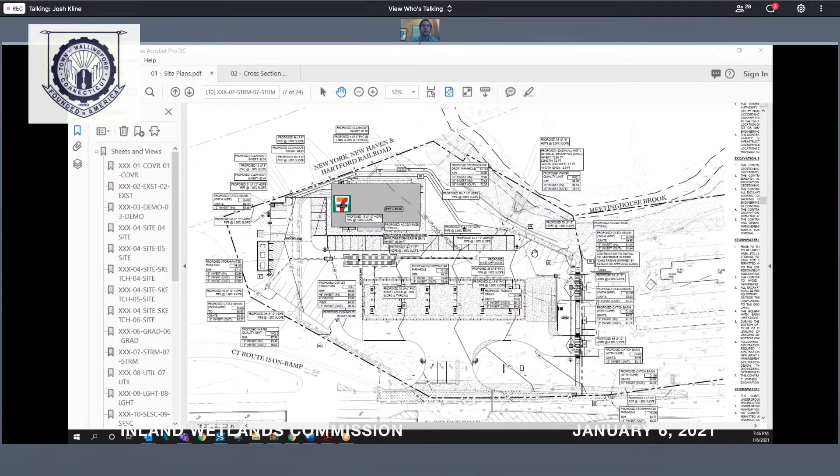The next item is still there, I just wanted to highlight the properties. So the next item in this train of events is we are proposing a water quality unit—a hydrodynamic separator. I wanted to note that the way this separator is built, there are four chambers and a series of baffles. So this unit itself has a lot of similarities to an oil water separator. Even though we don't have the separate oil water separator...

I think the intention of this water quality unit is to separate solids, collect any floatables, any trash, any hydrocarbons that were to float and make it through. So we still have that element as part of the plan, even though we've removed it and relocated it with a skimmer in the inlet. The next big change is at this connection point, where we've done two things.

We've raised the pipe coming from the fuel area so that it's about 1.5, actually 1.38 feet higher than the pipe coming out of the infiltration basin. So effectively these are no longer at the same elevation. We're connecting the fuel area further downstream than the infiltration basin, and we've made sure their inverts are separated, which would prevent any backup from going through the trench drain or fueling area. Those were the main changes addressing the big comments. I'm happy to answer any questions, but wanted to keep it short and to the point.

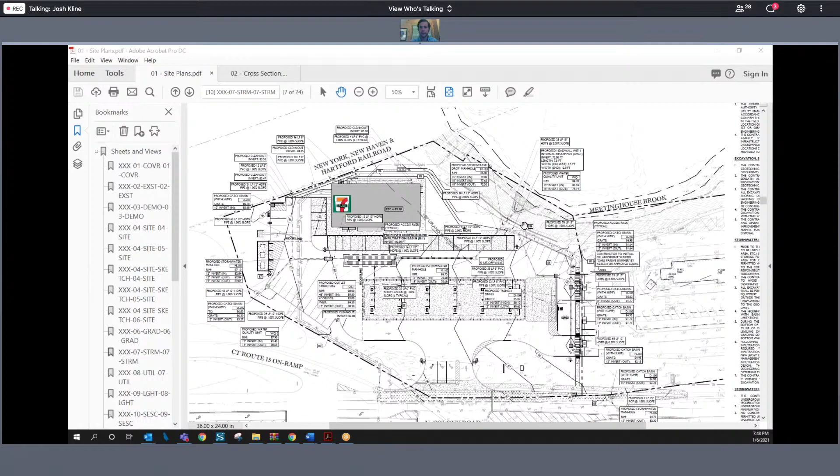I think those are the responses, Mr. Chairman. I know Josh has spent a substantial amount of time communicating with Aaron. Josh, maybe you can address this - I know you submitted a written response dated December 30th, which is part of the record, to some of Aaron's earlier comments. But as Aaron pointed out at the beginning, I believe we're pretty far along, if not there, from a staff perspective, in addressing the concerns that have been raised.

Okay, let me ask the commission first, but I am disappointed that you didn't find a separator that would separate the ethanol gasoline from the water, since I come across that from time to time. But it's a difficult issue. Commissioners, any comments, any questions?

Allie? I don't have any. Jennifer? I don't have any. Deb? I don't have any.

Robert? The question I have was about the drainage coming off of the 7-Eleven building itself. Is that tied into the water separator, or has that been changed to a different location, as you mentioned earlier? The building connects directly to an infiltration basin and its runoff is infiltrated. And it's tied into the runoff from the pumps itself also - are they tied in together? Sorry, one more time? Are they tied in together with the runoff from the pumps? So technically everything discharges at one point, but what we've done is separate both of those areas until that last manhole, that last structure before the discharge point into the brook.

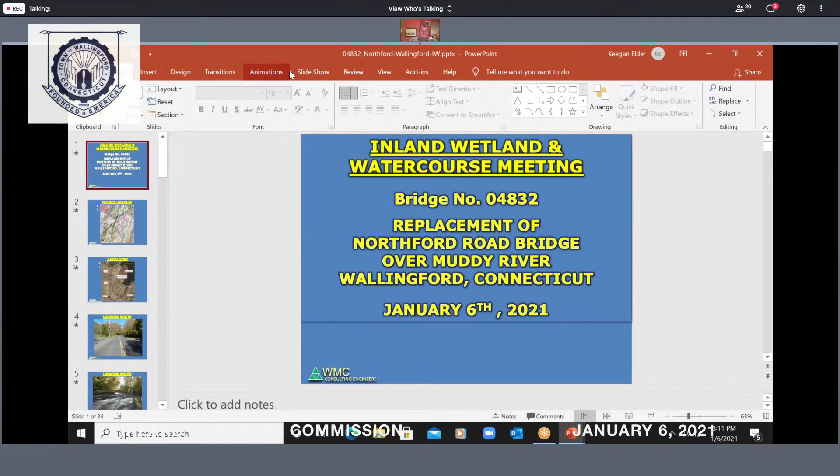Keegan is actually here for the next application on the agenda, so he could step away so John could present without a mask. That would be much better. I would appreciate it. Thank you.

No problem. Good evening everybody. My name is, as Allison mentioned, John Wayne. I'm here from WMC Engineers representing the town for the Inland Wetland Watercourse meeting, January 6th, 2021, for the replacement of Northford Road Bridge over the Muddy River in Wallingford, Connecticut. Conn DOT bridge number 04832.

I have a project location map. The project site is just southeast of the central part of town. I have a blow-up aerial view of the project site, in the lower portion of the stream. You can see the MacKenzie Reservoir just upstream.

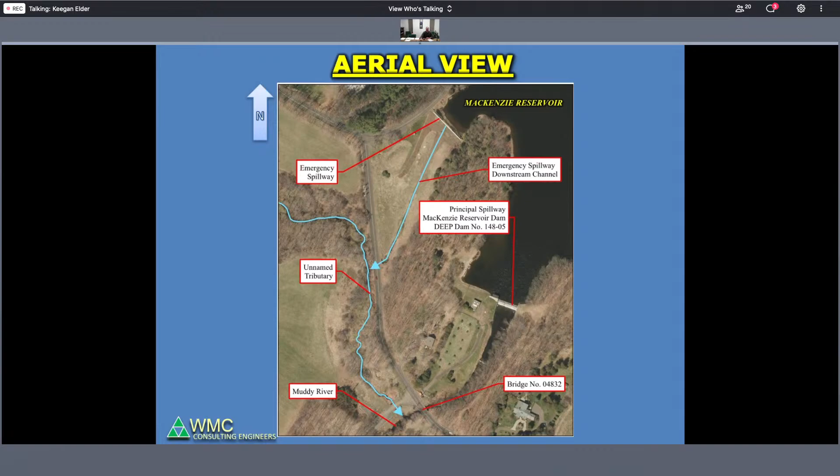Excuse me, there's a little lag time between the presentation and the screen here. I have a couple pictures: this is from the bridge looking north, this is from the bridge looking south, and this is the upstream elevation looking downstream at the bridge.

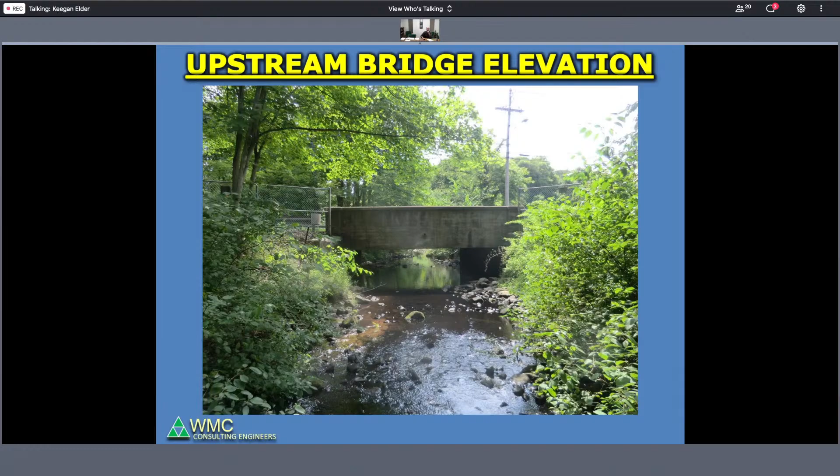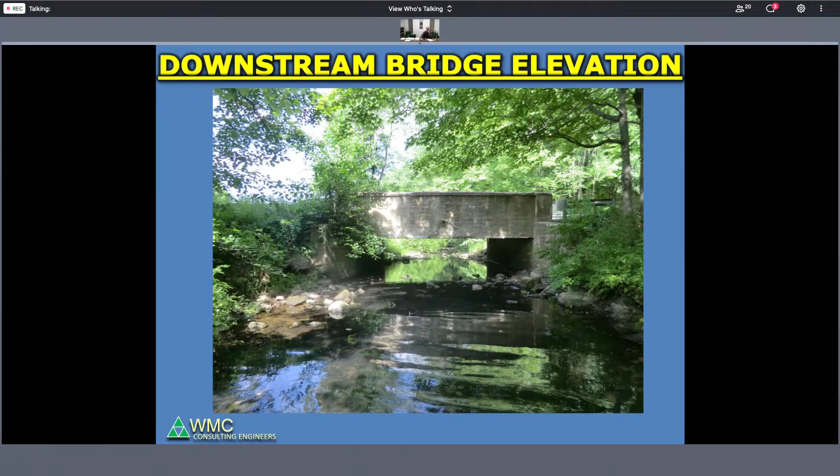Did we freeze? Yeah, just a little lag time. This is looking upstream from the upstream portion of the bridge. This is the downstream bridge elevation looking upstream. And this is looking downstream from the bridge itself. So a couple of these pictures just to get you familiar with the site.

So the existing bridge, number 04832, some reasons for the project: the Connecticut DOT inspects this bridge every two years. In January 2019 the bridge was inspected. The bridge was built in 1938, so it's approaching 100 years old. The superstructure was rated in serious condition, the substructure was rated in satisfactory condition, and the overall structural evaluation required high priority of corrective action. The bridge is currently safe but warrants replacement, and that's why we're here tonight.

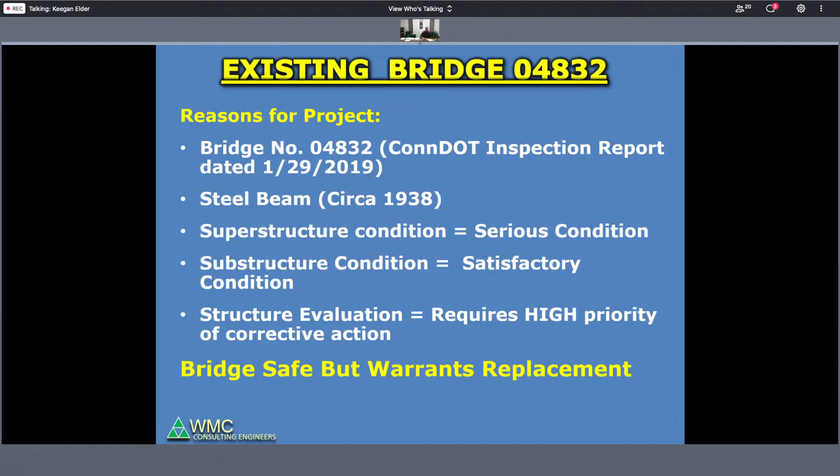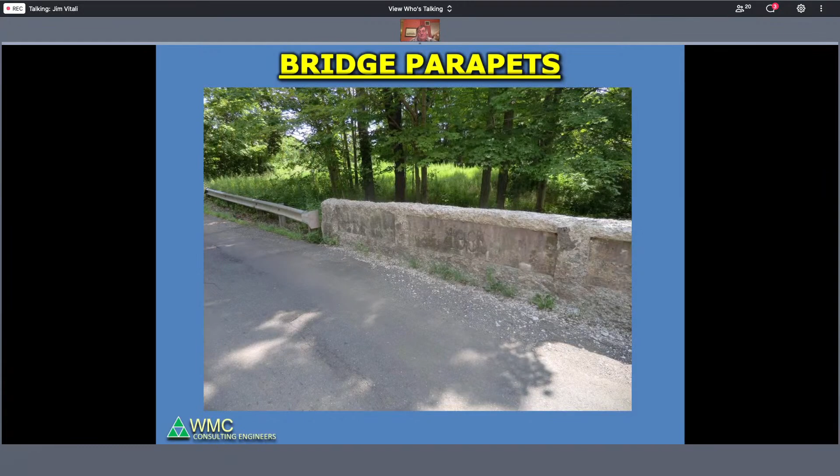Just a couple pictures of the bridge itself to show the condition, this is the underside of the bridge. Keegan, we really want to get into the wetlands aspect of this, not the structure of the bridge, please. Okay, I'm just trying to show a couple of the reasons why.

So here we are, environmental considerations. We've consulted with DEP and received coordination in 2020. They've determined it will not significantly impact any fisheries and/or habitat. Our unconfined in-stream activities will be limited to the time period of June 1st through September 30th. Our fisheries enhancements were included in the design, including rounded toe boulders at the toe slope and a rock vane installation. There are no known contaminated soils or hazardous materials within the project. Best management practices will be utilized during construction, all disturbed areas will be restored upon completion, and Town, DEP, and Army Corps permits will all be acquired.

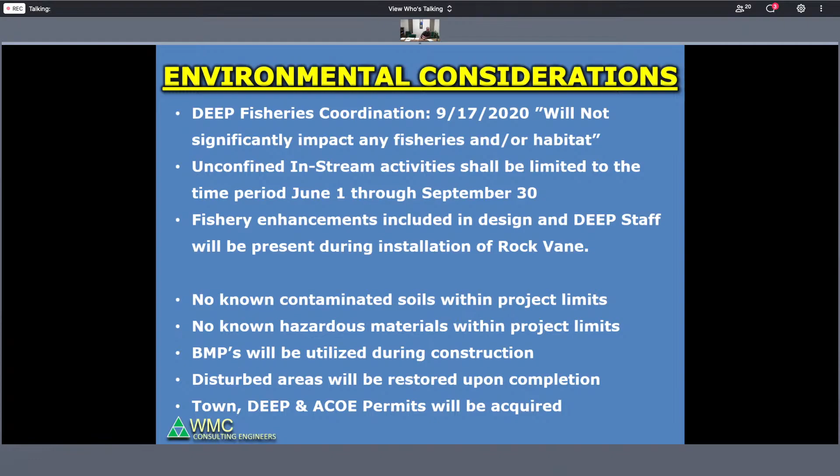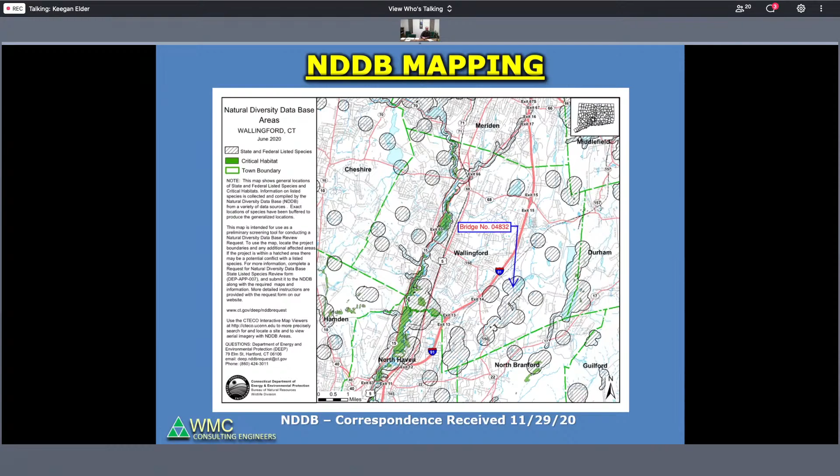The project is within a FEMA flood zone and an adopted regulatory floodway. The area is indicated by the DEEP to have species of special concern. We've coordinated with the NDDB and received coordination on November 29th, 2020. Both our 2017 coordination and our 2020 coordination identified 2 species of special concern.

As part of our contract documents, we will require the contractor to hire a qualified biologist to ensure protection guidelines are adhered to. Work shall occur between April 1st and September 30th when the species are active. No in-stream work shall occur between November 1st and April 1st. Exclusionary practices will be required.

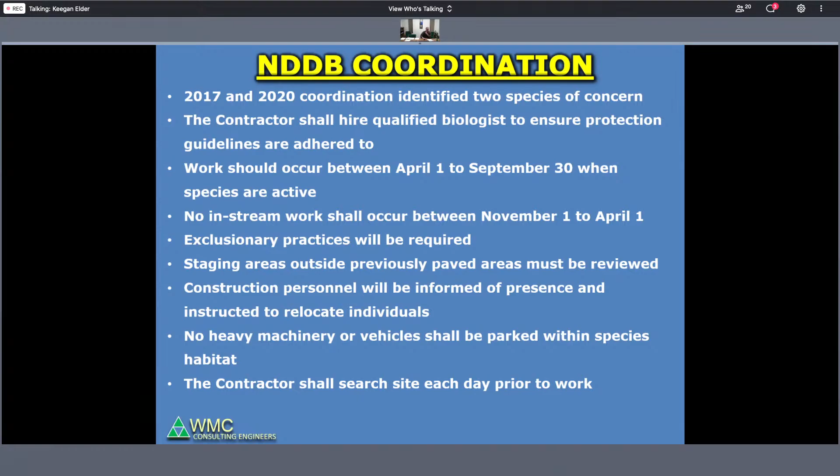Staging areas outside previously paved areas must be reviewed and approved. Construction personnel will be informed of the species' presence and instructed to relocate individuals. No heavy machinery will be allowed to park within any species habitat, and the contractor shall search the site each day prior to work.

The 2020 coordination also identified 1 known plant species of concern. A plant survey will be performed in the spring of 2021 by a qualified botanist. If found within the construction limits, a conservation plan will be developed to address short and long-term management recommendations. Findings will be submitted to the DEEP for final determination, and all correspondence and findings will be submitted to the town environmental planner.

Our proposed construction is to replace the bridge with a 40-foot clear span pre-stressed deck unit, with the superstructure supported on integral abutments and cantilevered U-type wing walls. Our substructure will be founded on micropiles, rock socketed into bedrock.

Our structure span meets the 1.2 bankfull width requirement and will remove historic fill in the wetlands and watercourse. We plan on leaving the existing concrete footings for the abutments and wing walls in place, removing only the stems 2 feet below grade, installing toe boulders along the channel and grading limits, and installing rounded riprap embankment protection. We will be maintaining existing channel grades and channel material.

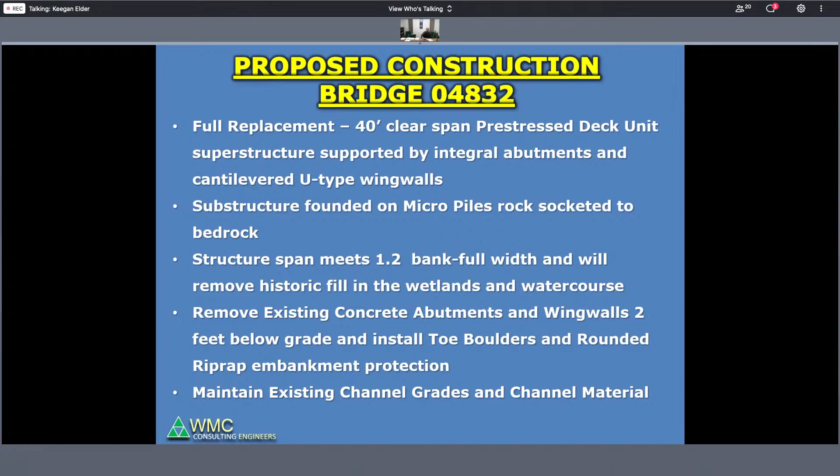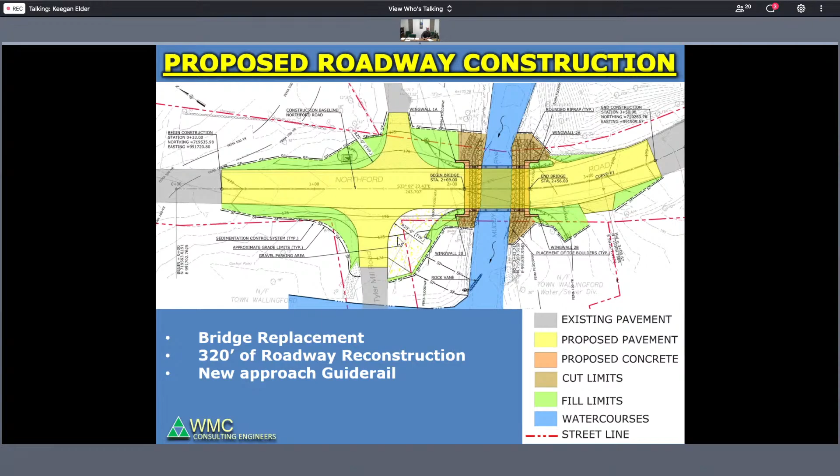Proposed roadway will consist of 320 feet of roadway reconstruction, a bridge replacement, and new guide rail. This picture shows the overall limits of the project. The yellow represents the new pavement. The green represents fill areas, which will be established with turf. This brownish orange material along the river is the area we are going to be removing, our cut areas. This yellow hatch is the horse trailer parking, which we'll be maintaining.

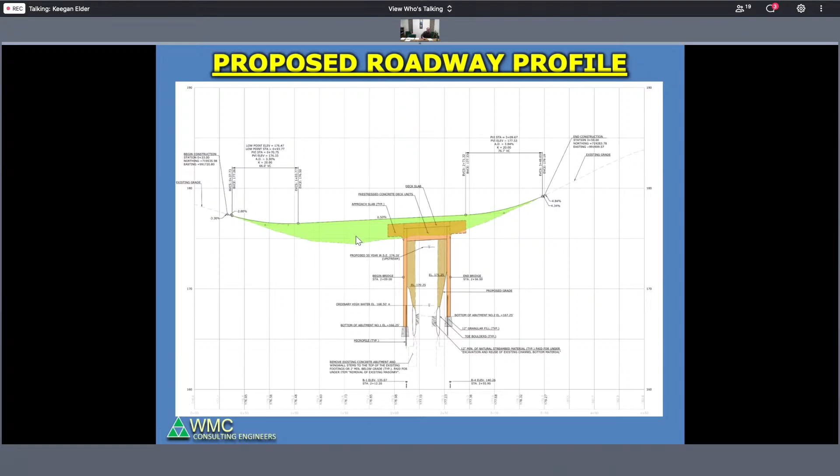We will be raising the road by approximately 2 feet at the low point. This is to accommodate a 50-year design storm for the bridge.

A bridge elevation view, which is not vertically exact, showing what the bridge is proposed to look like. The red represents where the existing abutments are, and the outside orange area with a concrete form liner is our new span. This area where the rounded riprap is shown kind of matches, but this brown area to the right and left of the red is where we're going to be removing all that material behind those existing bridges.

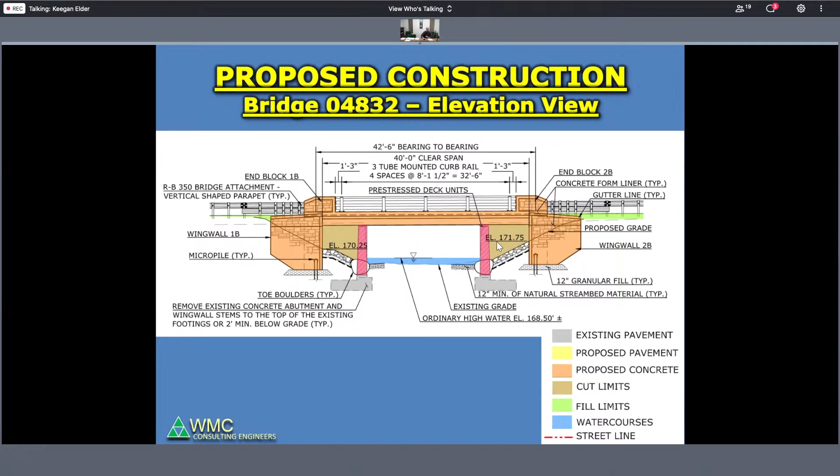We're providing 2 12-foot lanes and 2 2-foot plus shoulders on both sides of the bridge.

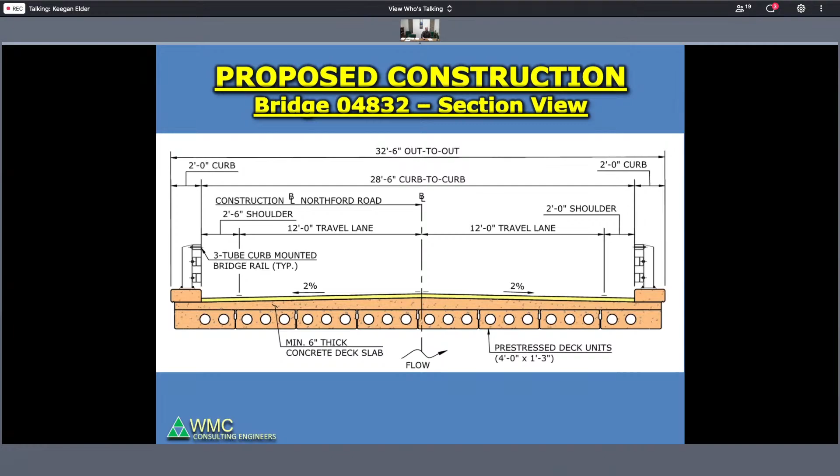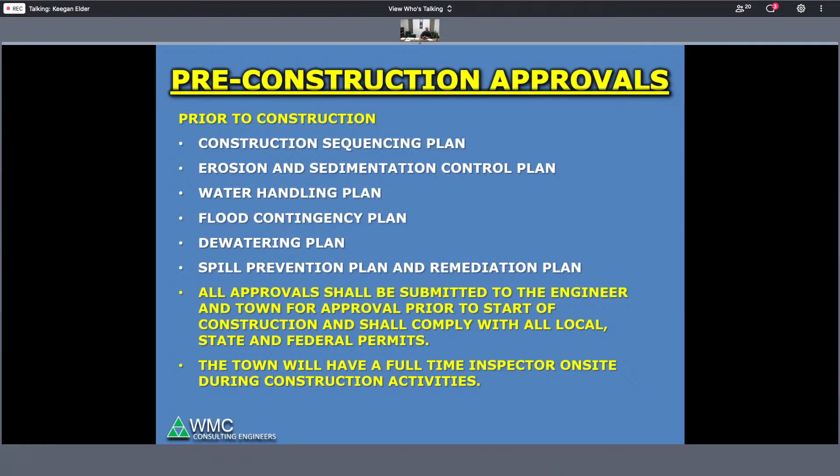For pre-construction approvals, prior to construction the contractor will be required to submit a construction sequencing plan, erosion and sedimentation control plan, a water handling plan, flood contingency, dewatering, spill prevention, and remediation plan. All approvals shall be submitted to the engineer and the town for approval prior to the start of construction and shall comply with all local, state, and federal permits. The town will also have a full-time inspector on site during construction activities.

Our proposed construction staging, on our design plans: Step 1 would be to install E&S controls. Then we'd like to install our temporary cofferdams downstream and install the rock vane. After that's complete, we'd like to install the debris shield and remove our existing superstructure.

Then we'd like to start constructing the new abutments and wing walls behind our existing substructure, utilizing the existing substructure as some water handling devices. After those new abutments are installed, we'll install water handling cofferdams in the channel in front of our existing abutments, and remove those existing abutments to 2 feet below grade. After that's done, we will install the toe boulders and the rounded riprap on the newly graded embankments, and then reinstall the natural stream bed material.

So let's just back up a second. When we excavate those walls out, we'll be removing the existing stream bed material and stockpiling it. Then after we're done with the riprap, the rounded riprap, and the stone bowl channel boulders, we will be reinstalling that stream bed material into the channel.

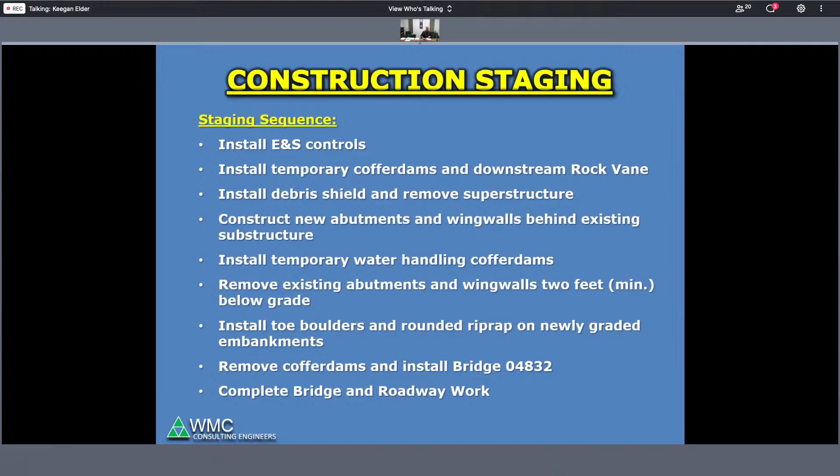After that's done, we'll remove the cofferdams and install the superstructure. Then we will complete all our remaining bridge and roadway work. So this is a little blow-up of the plan itself.

You can see downstream, we'd like to put this rock vane in early in the season. Then we'd like to come back and start building our concrete abutments on either side. We are going to maintain water in the center portion of the channel, maintaining flow at all times.

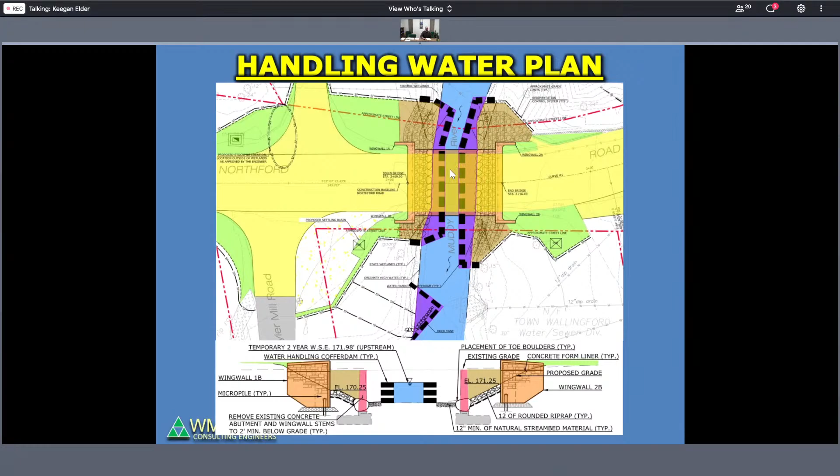Our water handling devices will be designed for a 2-year water surface elevation of 172 feet. And we are providing a hydraulic opening here that the contractor must maintain.

Our wetland and watercourse impacts: in my impact plan, we are impacting a total of 1,550 square feet of both state wetland and watercourse impacts. Let me just move the GoToMeeting. We also have about 9,200 square feet of upland review area impacts.

Most of our permanent impacts are going to be directly adjacent to the existing wing walls, where we're going to be cutting this material back to install our new wing wall structures. I believe it resulted in a negative fill of about -5 cubic yards that we're going to be removing out of the wetlands and watercourses in those areas.

As I just mentioned, we have 1,550 square feet of impacts, approximately 0.035 acres.

We met with Erin after her review of the project, and she requested us to put a plantings plan together. So we will be providing a planting plan, which will incorporate native species that exist at the site currently, and we'll also be using conservation mixes along the embankment slopes disturbed by the construction.

Our permits that we are going to be required: we will have our local inland wetland permit. Right now, Allison's working with the town to see if a local flood management permit will be required, and we'll submit that if it's required. We also will be going in front of the Army Corps of Engineers and the DEP in an interagency coordination meeting this spring, and they will determine what types of permits they require. Right now, we are anticipating a self-verification and a 401 water quality certification.

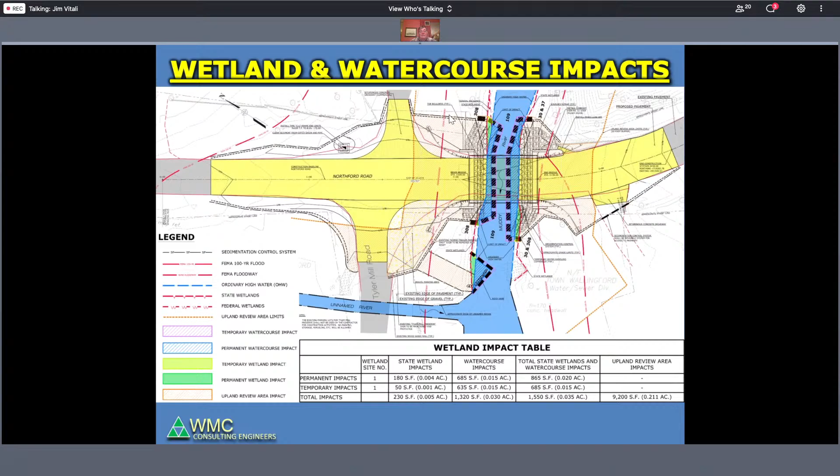Okay commissioners, comments, questions? How about Robert, any comments?

I do. You mentioned stockpiling the soil that you're removing to reinstall. Where do you plan on stockpiling it? Because I know that's a pretty well-used area for horses and trailers and what have you.

Yes, discussing with Erin, we do know that there are 2 parking lots that we will not be able to use for Tyler Mill, so those will not be used. We're also in that 100-year floodplain, as I mentioned earlier, with FEMA.

So right now, since the road will be closed to the east of the bridge, and there aren't many driveways for a few hundred feet, we'd like to utilize that area for construction trailers, staging of equipment, and stockpile of material.

Okay, thanks. So just another thing, we also have to maintain Tyler Mill open during construction, so there'll be a very, very small amount of space for the contractor to utilize on that western side.

That's all I had. Very good.

Debbie, no questions? Jennifer, I don't have anything. Ally, no, I'm good. Nick? All set, Jim.

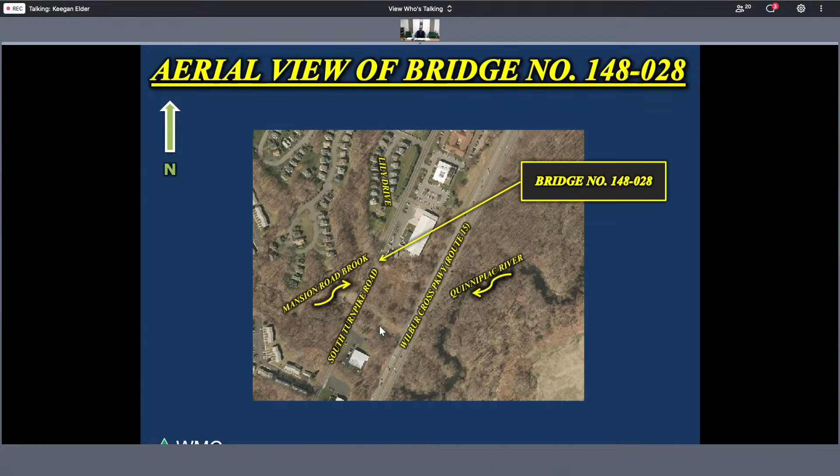Some general information about the structure before I get into the details of the wetland impacts: this structure is a twin 4x3 concrete culvert. It's in poor condition and in need of repair. It's funded under what's called a state local bridge program, so there is some review by the department and the town. That's the general information about the project.

Both culverts are about 39 feet long and run under the roadway.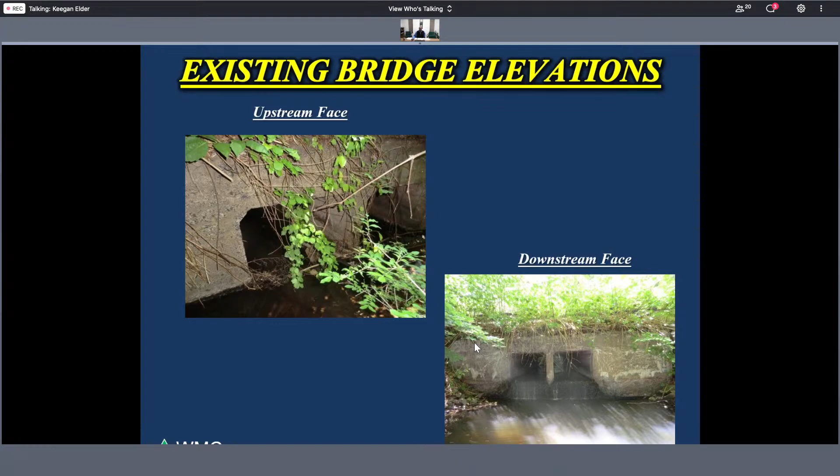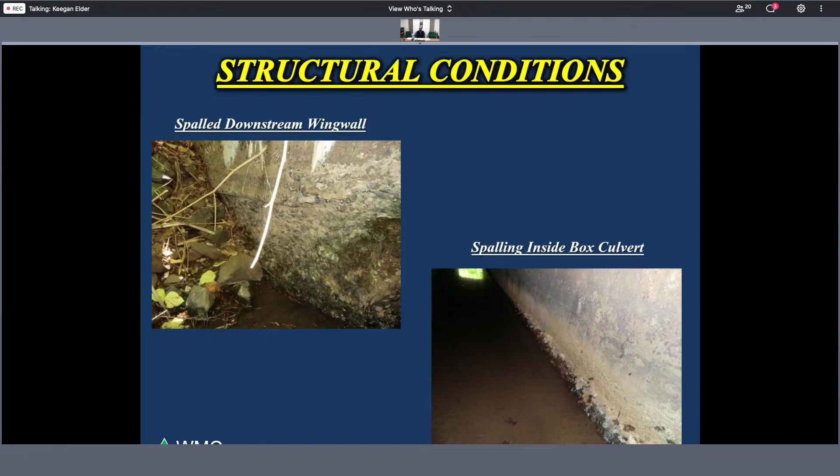Here's an upstream view of the structure standing in the channel, and in the bottom right, the downstream elevation of the structure. Some of the deterioration on the head walls are things we're going to fix, and on the interior of the culverts there's spalling and deterioration that warrant rehabilitation.

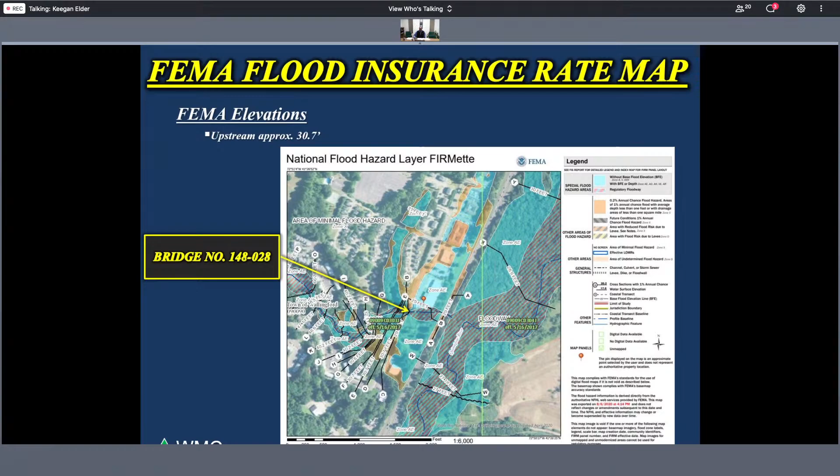FEMA flood elevations—not much happening here, we're in the flood zone. This is an existing conditions map. In green, you have the FEMA floodway. Blue would be our wetlands, federal and state, and red dash would be the watercourse upstream, and we go downstream here.

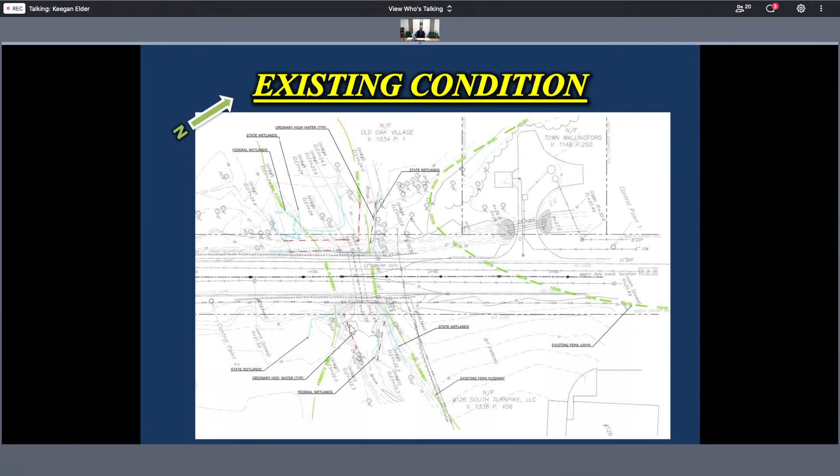So the proposed construction activities: we intend to line these culverts with concrete, centrifugally line these culverts, and patch the wing walls. Essentially what we're going to do is handle the water and do half at a time—divert water from one culvert while we do work in the dry in the other culvert, then flip it once we're done with the first.

The concrete lining we're doing is a centrifugal liner that we've used on projects for the state, things like Route 2 and Route 9, where we don't want to disturb traffic above but want to work underneath. They pull this sort of 'Gatling gun,' as they call it, through, and as they slowly pull that machine through, it spins and sprays fiber reinforced concrete on the existing system.

This culvert is going to have a 1-inch thick fiber reinforced liner on the inside for both structures when we're done. The contractor will get in there with hand tools and smooth things off, and also do upstream and downstream work on the wing walls and head walls.

In addition to that work in the watercourse and wetlands, downstream there's a significant drop off, as you saw in one of the earlier pictures. We're going to install a riprap splash pad or riprap boulder cluster just at the outlet. This will help alleviate the undermining problems currently occurring there.

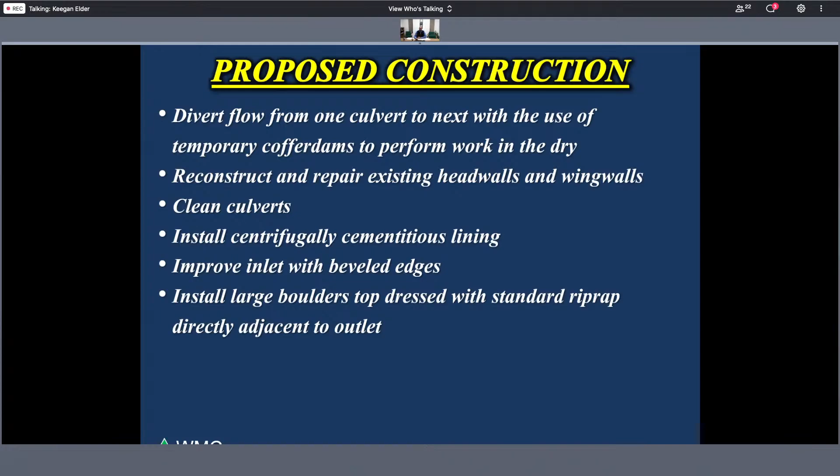On this view, in the legend, the green represents the watercourse impacts. These are the culverts here right next to each other that we're going to line with that centrifugal reinforced concrete, and as you get to the outlet, we're going to install the boulder cluster right here.

Let's go back—yep. So the riprap downstream just at the outlet helps with velocities. This grading you see here opens up the downstream pool, provides additional habitat, and this is the rock vane just downstream of that grading, which helps slow velocities as water comes through here.

So our watercourse impacts are shown in green. We have wetland impacts in blue—those are temporary wetland impacts.

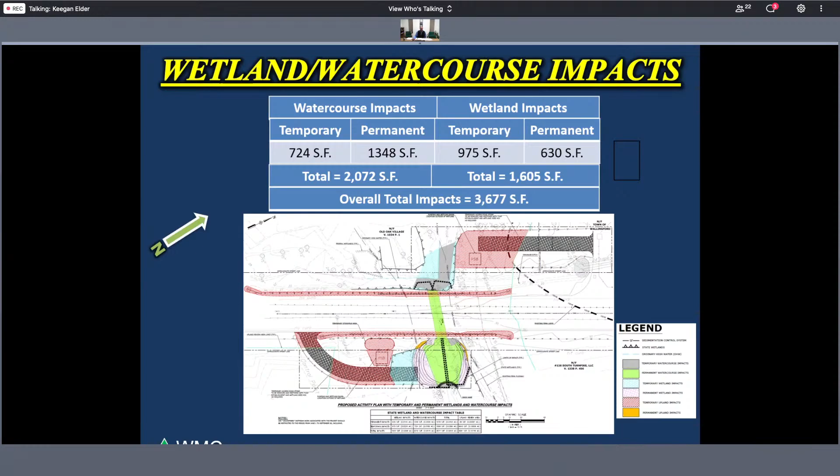Here's a typical section showing the existing culvert, flow running from left to right, traffic right and above. We have overburden or fill over the culvert, guide rails off to the side. As I mentioned, we're going to be putting a liner in on the inside - a centrifugally cast liner. We'll bevel the edges of the culvert. The reason we bevel the edges is to help with velocities and hydraulics.

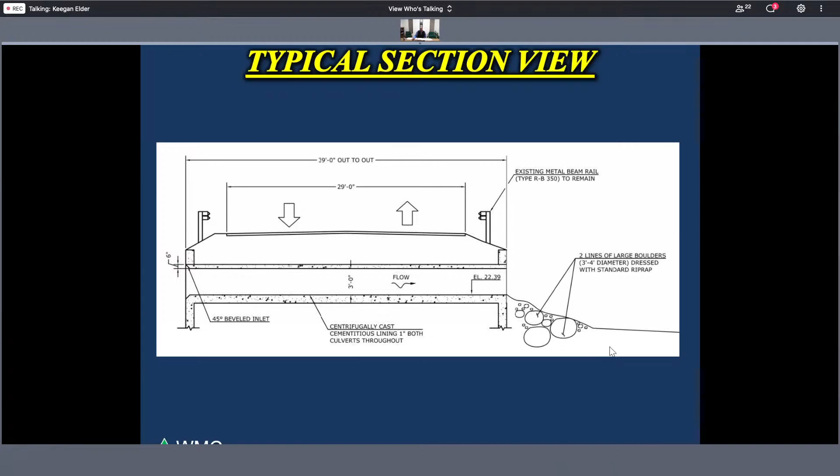When we add the liner, we're reducing the hydraulic opening by that 1 inch. In order to offset that, we bevel the inlet, which allows or funnels water through faster, and that helps with the hydraulics. Just downstream, you can see the riprap area I talked about to protect the culvert from being undermined and also stop the erosion happening right now at the outlet.

Floodway impacts: because we're lining, we're adding concrete - that 1 inch on the inside of both culverts. So the state considers that as filling the floodway. In addition, we're adding the riprap just downstream, which is also considered fill. So to offset that and address fisheries concerns of having a downstream pool, we increased the area of the pool and graded the channel back in that area.

So we offset our area so that we have a net cut at this site, to avoid any further concerns about filling in the floodway. That's one of the main reasons for having the downstream pool configured the way it is, in addition to the fisheries requests.

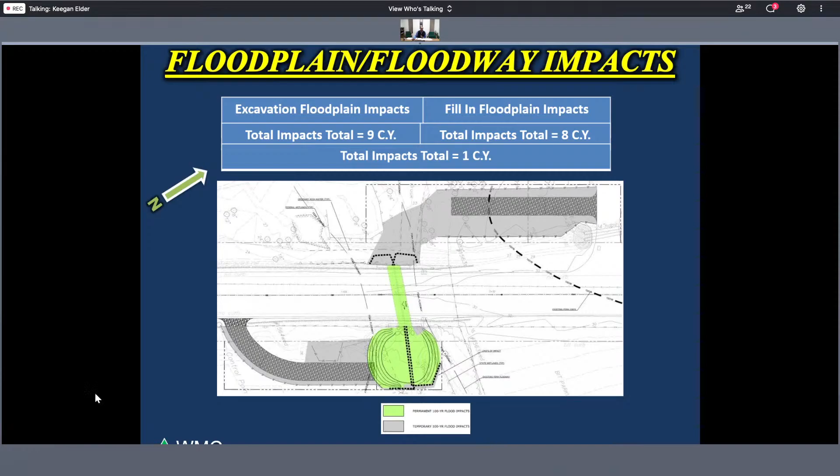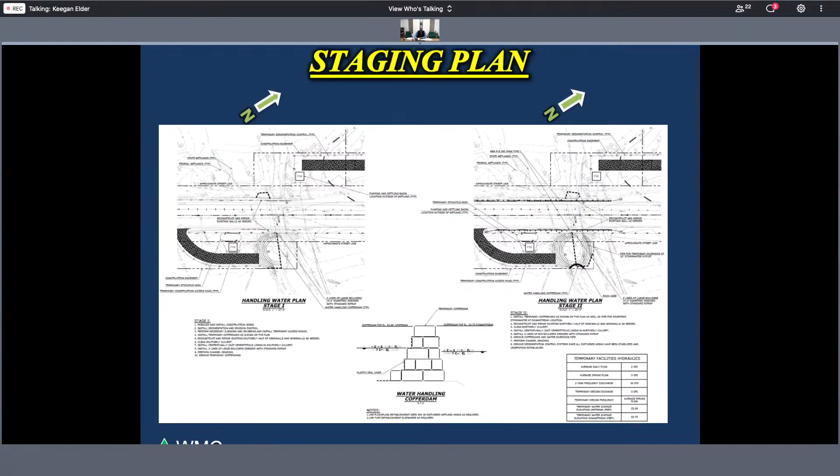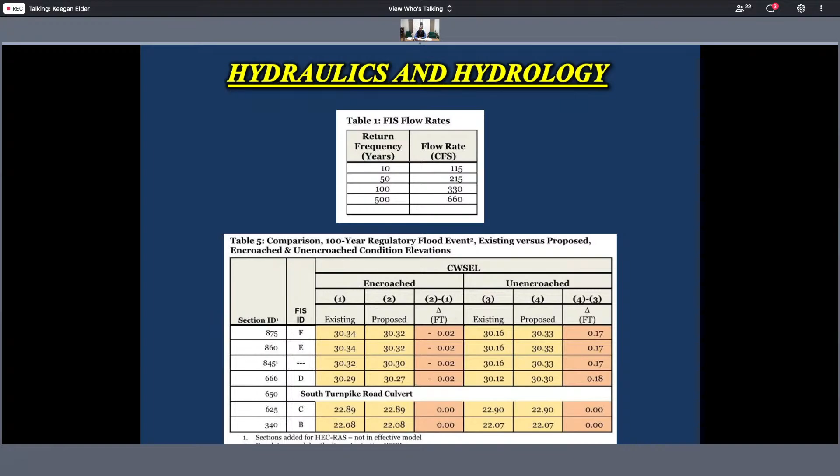Some hydraulics and hydrology: we're designing for the 100-year storm. We're showing no increases to the water surface elevation for construction. Beveling those edges at the inlet does help from a hydraulic standpoint.

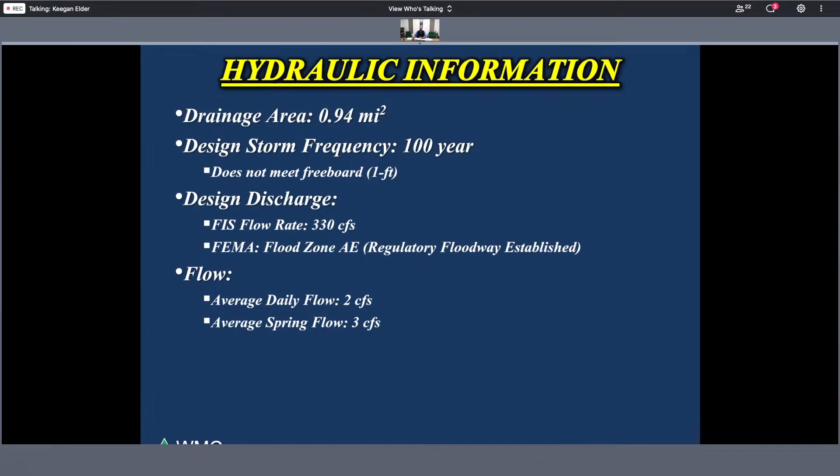Some more information to give you an overview of the project: the drainage area here is less than a square mile. Design storm frequency, I mentioned. We don't meet the foot of freeboard, but we don't make any existing conditions worse by repairing the existing structure. For flow design for temporary purposes, we gave the contractor the daily flow and spring flow - 2 CFS, 3 CFS - so he can design his temporary cofferdams to capture that within the watercourse and wetlands for this project.

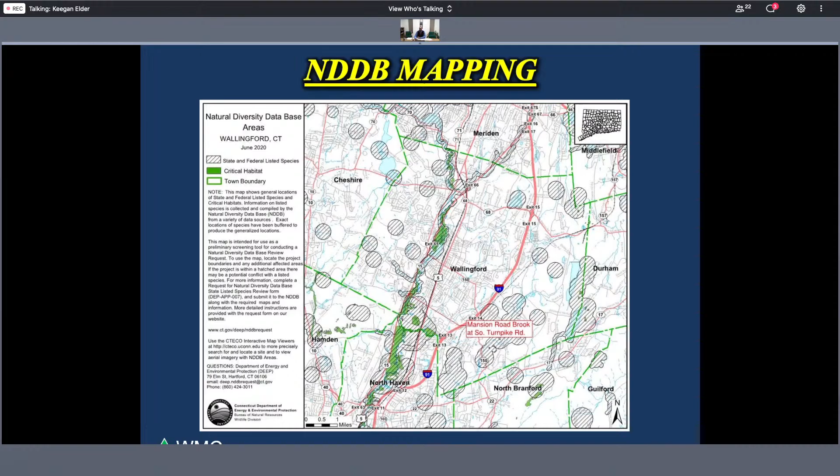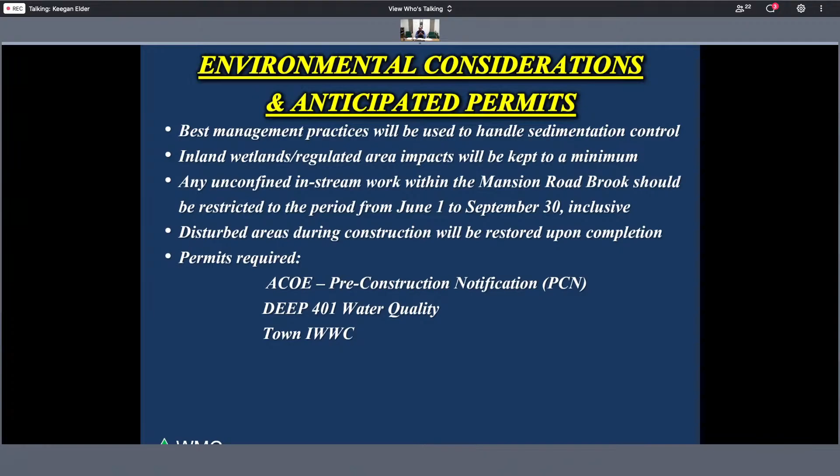Permits we anticipate at the federal level include the Army Corps' pre-construction notification, or PCN, along with the DEEP 401 water quality permit - I believe they just changed the name of that one - and then the town's local inland wetland permit.

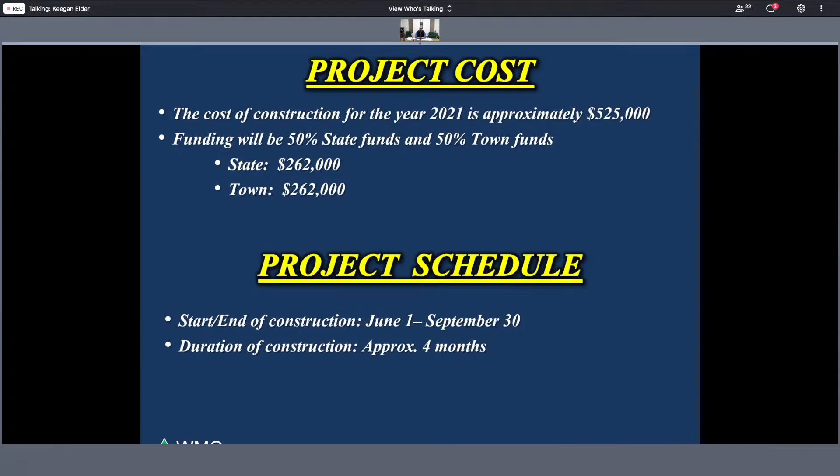Okay, let's see - I'd like to get you to drop your presentation, I think. How's that done? So I can get a full screen again? Stop sharing. Stop sharing. That did it, very good.

Okay, commissioners, comments? Ally? I don't have any questions. Jennifer? I don't have anything. Deborah? No, no questions. Robert? No questions.

Nick: Jim, isn't this the culvert that was undersized because of upland development, that the water kind of backs up on the west side of it and barrels through there at a high rate of speed? If it was going to be replaced, didn't it need to be a larger culvert? Is this just a Band-Aid? I believe this is the culvert where the water backs up alongside Mansion Road when we get heavy rains.

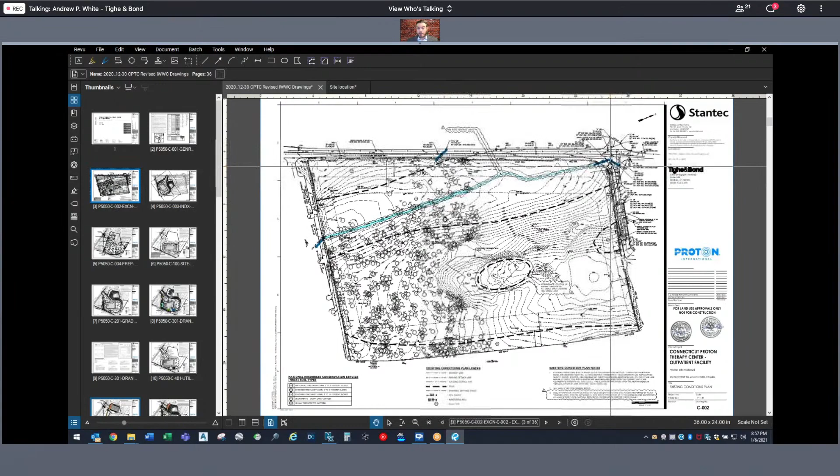For the site plan itself, we have proposed a 27,812 square foot building, the footprint of which is 18,000 square feet. As mentioned earlier, the square footage of impervious surface on the site is 74,663 square feet.

Access comes off of Northrop Road, and the development itself is situated at the southern end of the site. Our impact on the site is approximately 4.8 acres, a majority of which is taken up by the building, parking, and grading surrounding the site.

Stormwater management is being accommodated on site per the town of Wallingford standards and state stormwater quality standards. We are in the aquifer or watershed protection district, so we've been closely coordinating with the town of Wallingford to provide sand filters and additional treatment for our stormwater flows.

As I mentioned before, 90% of the site is traveling down to the 24-inch culvert at the southern end of the site. The man-made drainage swale we are proposing to intercept with our development and relocate it in a culvert underneath our site driveway, daylighting it for about the last 100 feet.

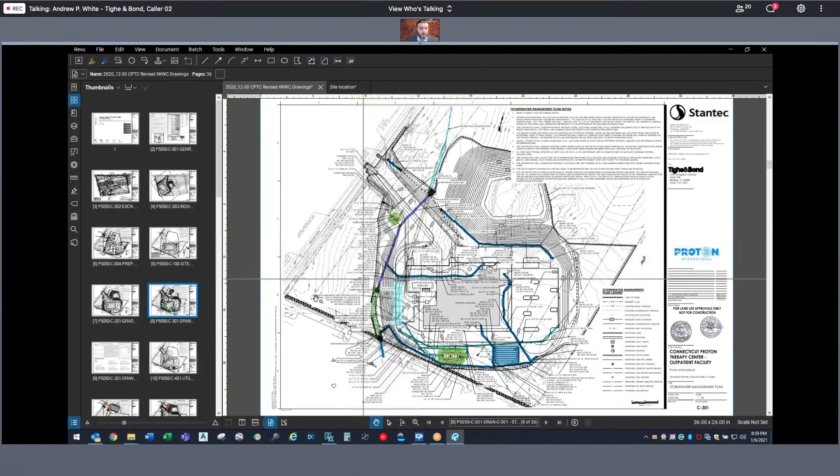For erosion controls for the site, we have proposed a two-phase implementation of the soil erosion controls, particularly due to the active drainage swale during rainstorms. We are proposing to cut in a construction entrance off of Northrop Road, have a timber mat crossing of the drainage swale. We will be stripping and stockpiling existing soils on site, and we are providing 2 sediment basins to control sediment. We also are proposing hay bale check dams throughout the drainage swale and additional protection by the culvert to the south that goes off our property.

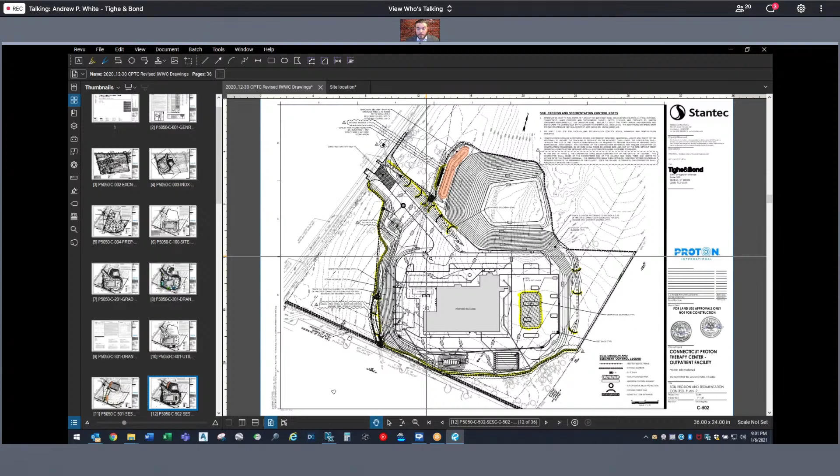The second phase of our S&E plan is once more of the development is in place. This shows one of the sediment traps would be decommissioned by the time the building foundation is getting installed, and we would maintain the second sediment trap during the completion of construction. The perimeter erosion controls will be adjusted as the development continues.

This is the high-level presentation. We meet the Wallingford town standards for stormwater compliance, the 2004 state standards for stormwater, and the 2002 stormwater soil erosion and sediment control standards. I'm more than happy to take any questions on the project now. And let me stop sharing my screen.

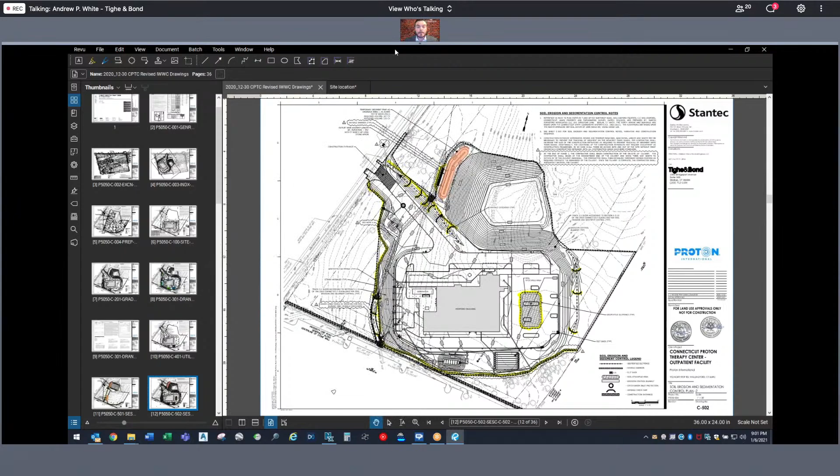I'm sorry, I was off. Robert, questions? No questions. Okay, Jennifer, I don't have any questions. Ally? No question. Deborah? No questions. Nick? I just have one form.

Is the northern side of the property all ledge? Have you done any soil testing out there to see what type of soils you're going to be dealing with? For the northern side of the site, we've done soil sampling for the entirety of the site. The northern side we are not developing on, so it will remain forested. Ledge is common throughout the site, typically 6 to 8 feet deep. There are some pockets where it goes very deep, and we didn't find any in our test pits, but for the most part, ledge was 6 to 8 feet deep.

So you won't be doing any blasting out there? There may be a little bit of hammering of rock for the lowest portion of our foundation, but that's currently being evaluated. What we found in our investigation is that there's a layer of weathered rock sitting on top of sound bedrock, so we're anticipating some scraping of the weathered rock off of the solid bedrock. So all your storm drainage piping and anything underground, you won't have any problem installing it? No, we will not have any problems with that. Okay, thank you, I'm all set, Jim.